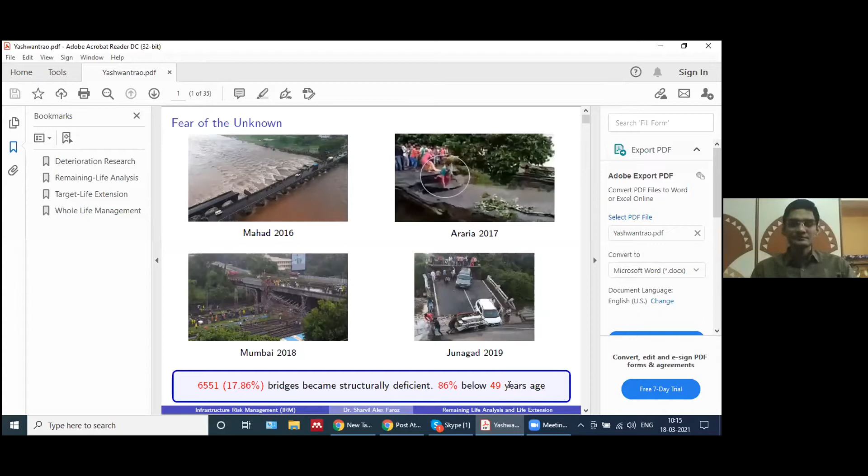Before getting to the main topic of my presentation, I will give you a kind of background. You can also give your comments in the chat box. How many of you, when you are going under a bridge, either walking or going through a vehicle, do not feel safe? I myself, sometimes when I'm walking under a bridge, I look up, wondering will it fall or not.

So that is how the situation has become these days. Basically, it is the fear of the unknown. We don't know when a particular bridge is going to fall. And why has this mindset come? Because from the past 5 years, since 2016, there has been at least one bridge collapse in our country. Here are the few major events which had occurred.

In 2016, this was the Savitri River bridge collapse in Mahad. Then in 2017, there was a bridge collapse in Bihar, Araria. Then in Mumbai in 2018, this is the Andheri bridge. And then this is the Junagad bridge in 2019. So if you see, every year there is one collapse of bridge. So it is natural that we feel unsecured when we pass under a bridge, or any other infrastructure for that matter.

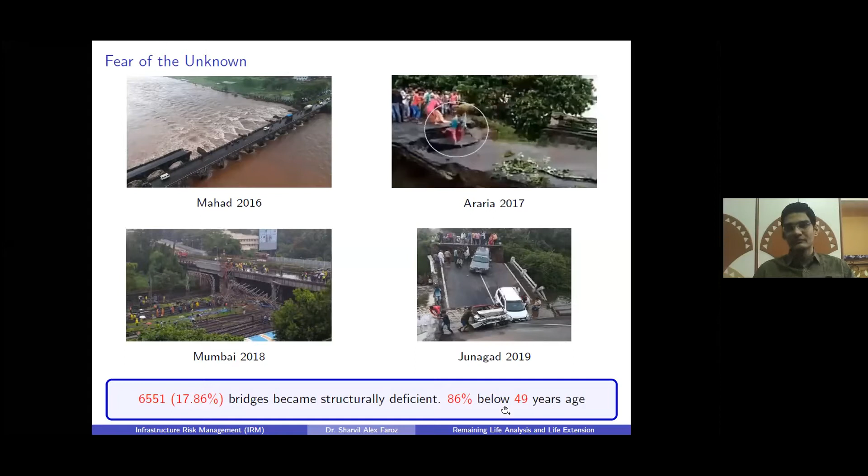Now, as I told you about deterioration, these deteriorations are very important if you want to know the condition of a bridge. And since this is a platform for innovations in concrete, understanding the deterioration is also one of the innovations. So let us understand a few basic deterioration cases which are very common.

There are others also, and since we have a limited time frame of 1 hour for our presentation, I'm going to present only about very limited technology. In 1 hour, it is not possible to cover everything for a given bridge, but you will get an idea of what kind of things are going on and so on.

So this you can know here. First, basically 80% of the problems are due to corrosion only. Mostly, if you see, 80% are due to corrosion.

There is chloride induced corrosion and there is carbonation induced corrosion. If you go to a beach and observe the structures close to a seashore, you will find that a lot of corrosion is happening, because of the chlorides which are coming from the sea. They go and attack the concrete.

Then the second one is loss of strength of the concrete. If you build something at M20 grade of concrete now, over 50 years the strength will reduce somehow, because of other various attacks which are occurring.

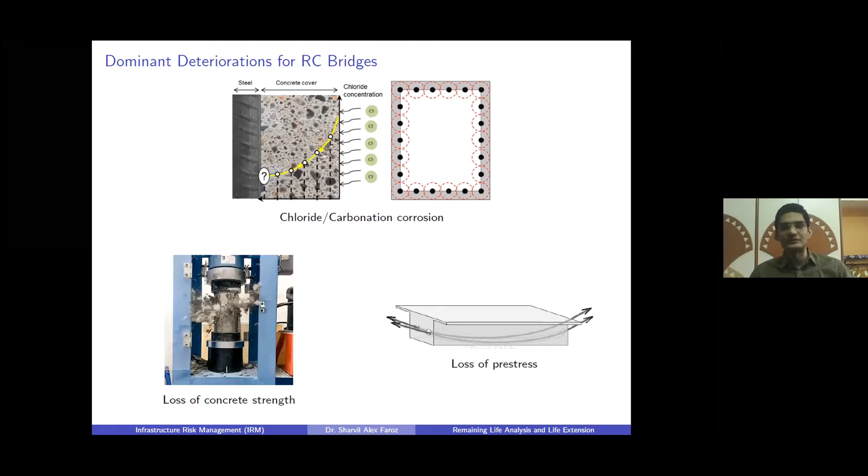Then this last one here is the loss of pre-stress of concrete. We are seeing a lot of pre-stressed bridges, but over time these strands lose their pre-stressing force, and this is a very big challenge in the industry today, because many bridges we have constructed are pre-stressed, but we are not able to find out

what is the existing level of pre-stress. We have also developed technology for this, but again, this is limited to only remaining life analysis. So I'm not going to tell more about this.

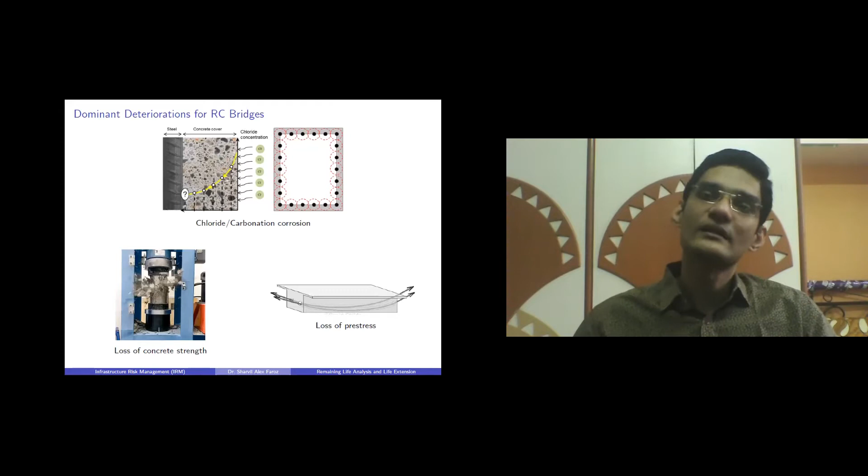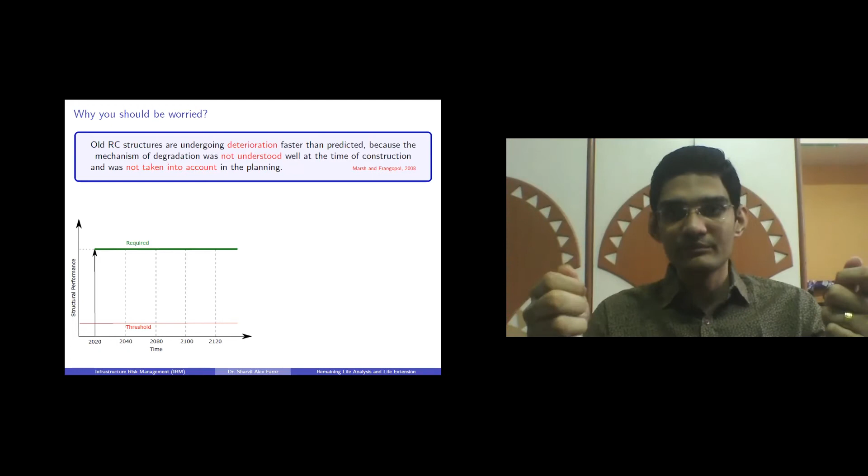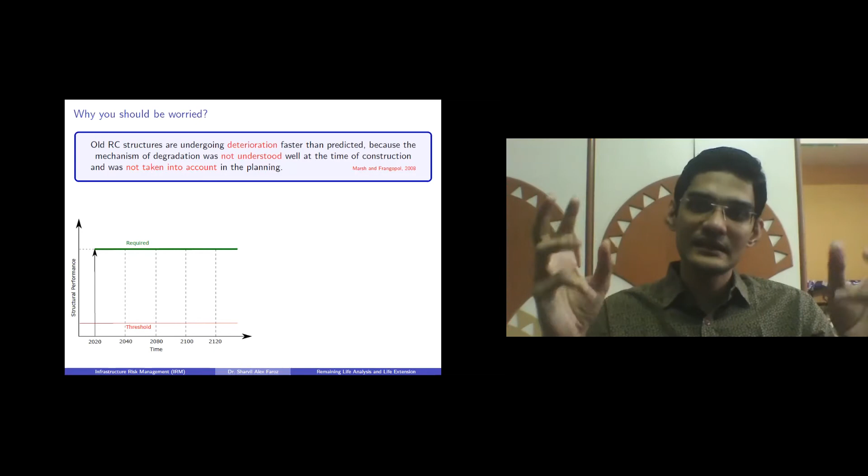You know that in simple language, if we do not consider a particular load on a bridge while designing, and when that load comes on the bridge, it fails. The simple logic is that this is a simple logic. So we did not consider deterioration to be an external load. Therefore, whenever deterioration takes place, it causes failure of the system.

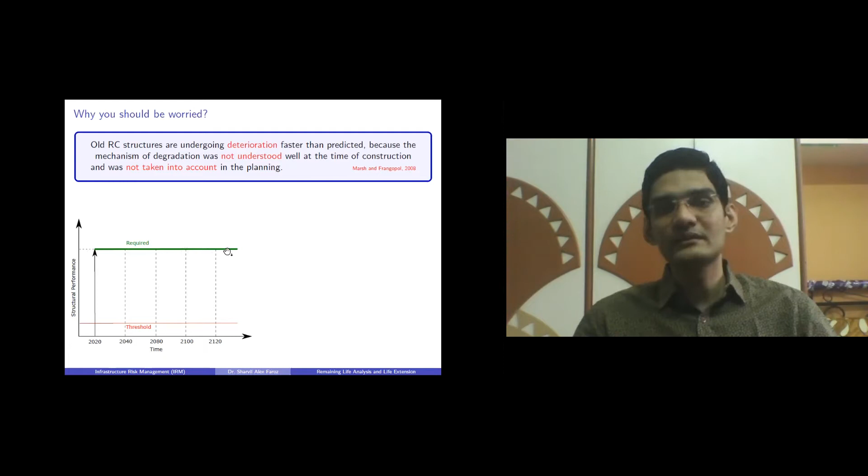So here in this figure, you can see what I am basically saying - that when I constructed this structure, I considered that the performance is going to be the same throughout its life. That is how we used to design the structures. We did not consider that the performance is going to fall down.

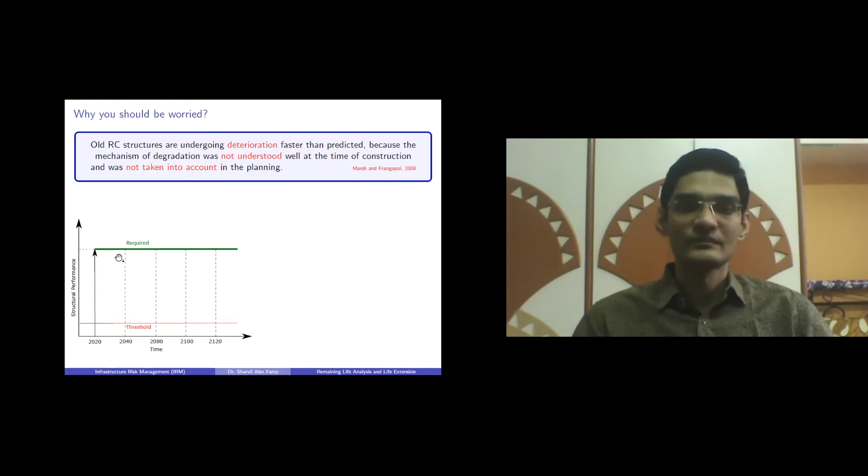Then the other issue is also that when we are doing investigation of these bridges, we do visual inspection. But what happened in New Zealand, these engineers were going and doing inspection of the bridges. And one of the bridges, which is called the Sorell Causeway Bridge, they also inspected that bridge. It was very close to the seashore, and it was a pre-stressed concrete bridge.

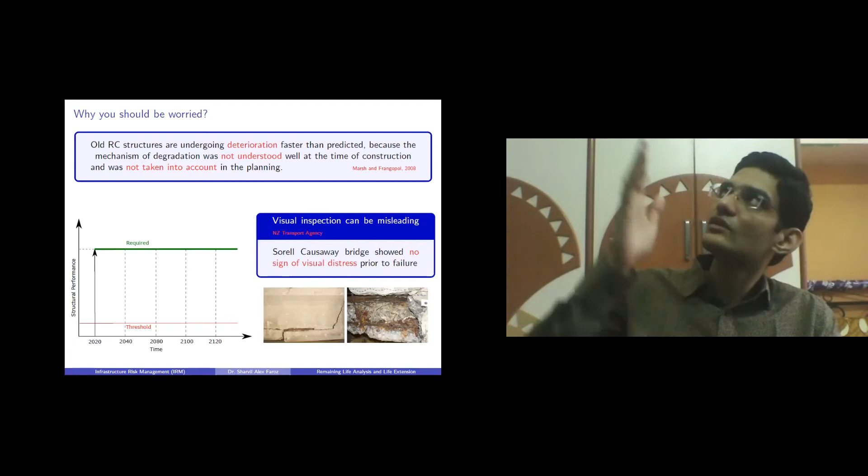From visual inspection, they did not find out anything. But within 6 months, that bridge collapsed.

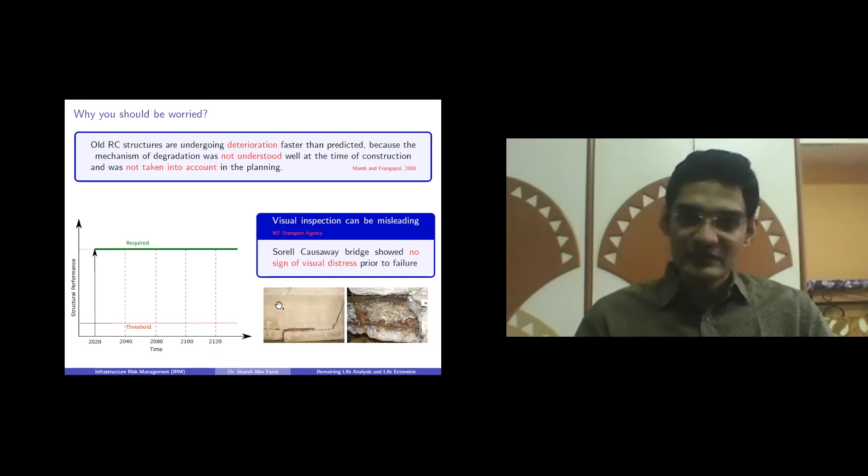When they investigated, they found a lot of corrosion, and at some places the strands were also broken. But somehow on the external face, they did not see any visual signs. See this picture here - anywhere you look, you will not find any kind of distress.

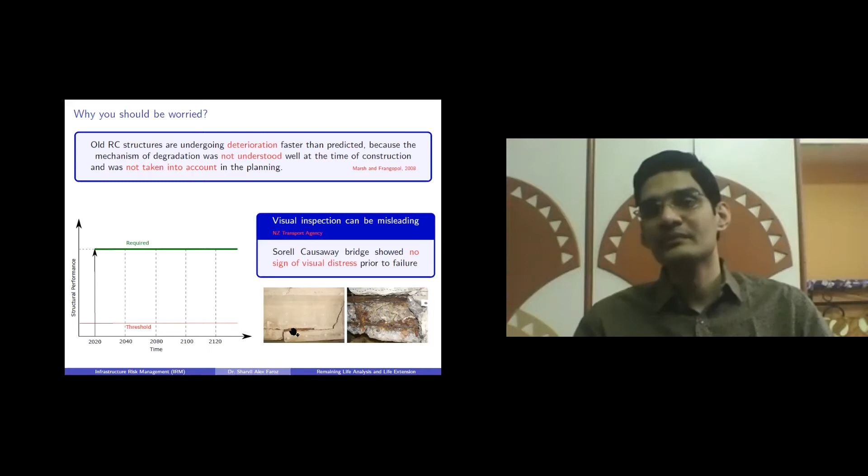These cracks you see here appeared after the collapse - when the bridge collapsed, these cracks appeared. But before that, no signs of distress were seen. So this is also one issue: we cannot rely on visual inspection always to check the condition of the bridge. This is also one of the reasons why bridges have collapsed.

So what we learned here is two things. First, we did not consider the deterioration in the design stage. Second, visual inspections cannot be relied upon. So we need something better to do an assessment of the bridges.

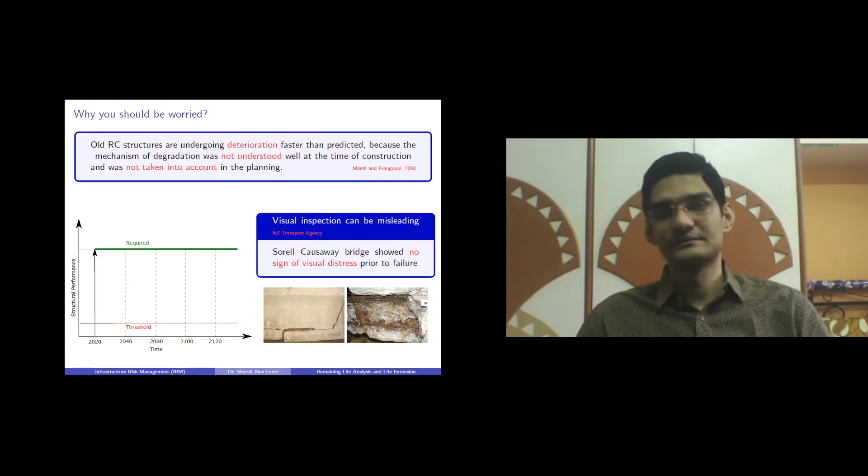Let me share with you 3 points or 3 demands of the bridge owners. Recently I spoke with one of the PWD engineers, and they told me that we have so many bridges.

The issue is, first of all, we do not know what is the condition of the bridge. Since there are so many bridges, it is very difficult for us to tell if a particular bridge is going to collapse, or if it is safe - that we do not know. So always the first question they have is: when will the particular bridge collapse? Will it collapse today, tomorrow, day after tomorrow, or will it collapse when I am standing below it? This is a very fearful situation which is there today.

And the second question which they ask is, if we want to extend the life of that bridge, is it the right time to do the retrofit, or is it the right time to do a repair or rehabilitation of the bridge? I will tell you why this is important.

See, first of all, a bridge is so costly that you cannot directly go and replace it unless there is a complete collapse. So first of all, we want to save money because the government is saying we do not have enough money to spend. Therefore, with minimum amount of money, how can we extend the life of the bridge? So the timing of retrofit is also very important.

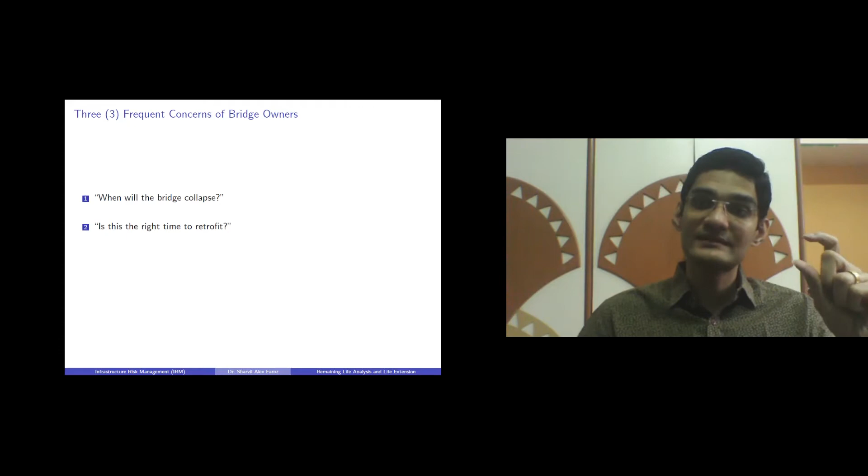Take an example: if the bridge is going to collapse tomorrow, and if I have to do retrofit today, then what I am essentially doing is a complete rebuilding of the bridge - so the amount of money spent is more. Now suppose I know 5 years back that my bridge is going to collapse on 19th March 2021. Then I would have done repair at that time, 5 years ago, and spent very little money to extend the life of the bridge. So the timing of the repair is also very important - timing decides the amount of money, because more the deterioration, more money you have to spend for doing the repairs.

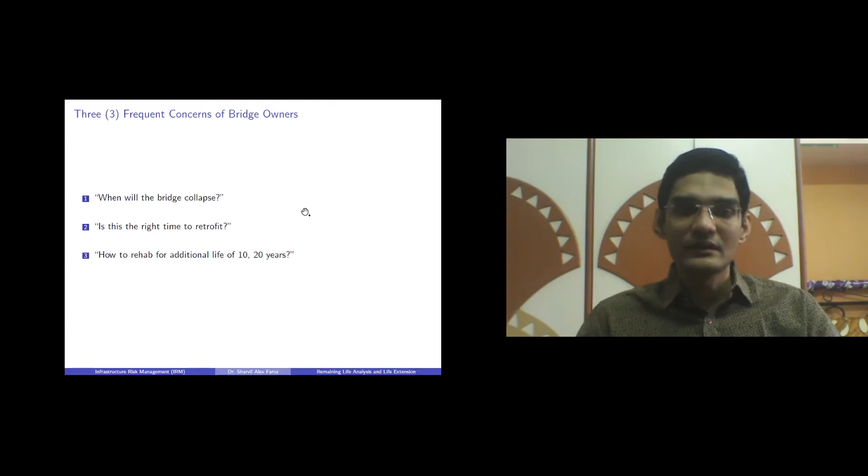And thirdly, if I want to extend the life of the bridge for 10 years, what kind of rehabilitation scheme should I use? You might ask why I am including this here - I'll tell you why. Whenever we ask the contractor or the consultant, who are basically repair contractors or repair consultants for bridges, what will be the extension of life after you do the repair, they will say 5 to 10 years. You also heard this, right?

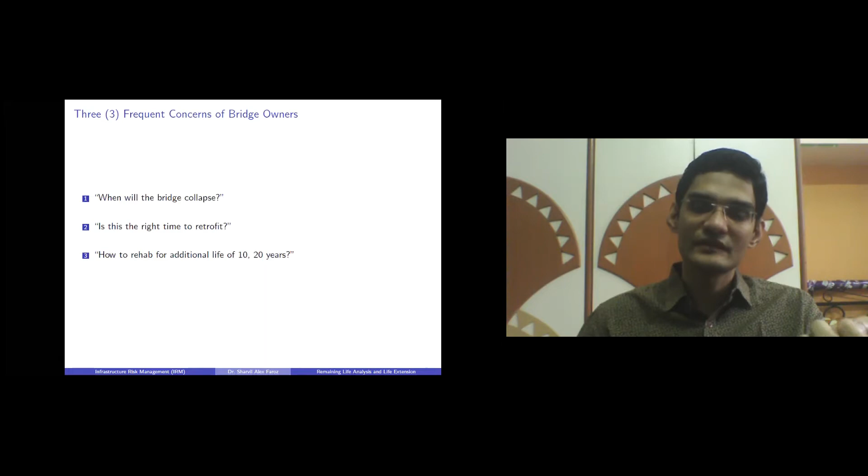So we have to do something such that whatever retrofit we are doing to the bridge, its performance is such that it is in our hands to control it, so that we can provide exactly the repair which is needed to give an exact life of 10 years or exact life of 20 years.

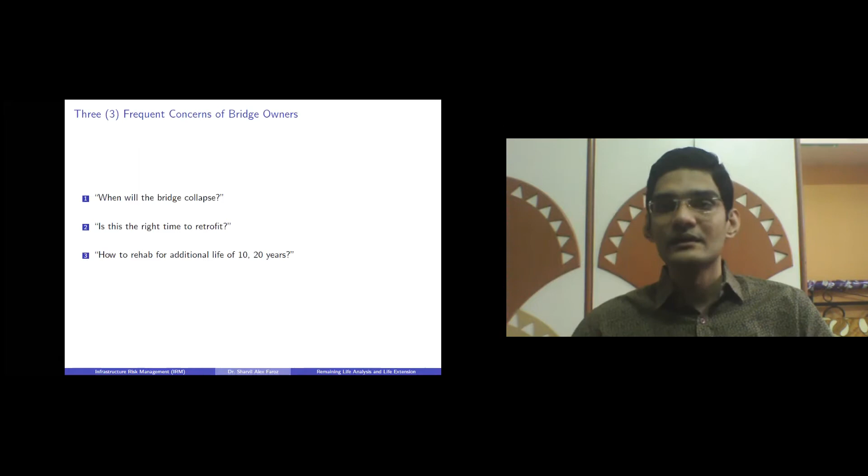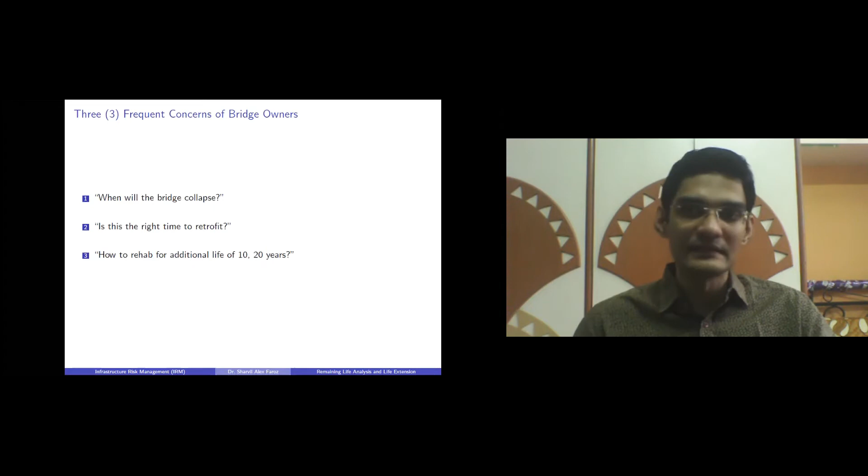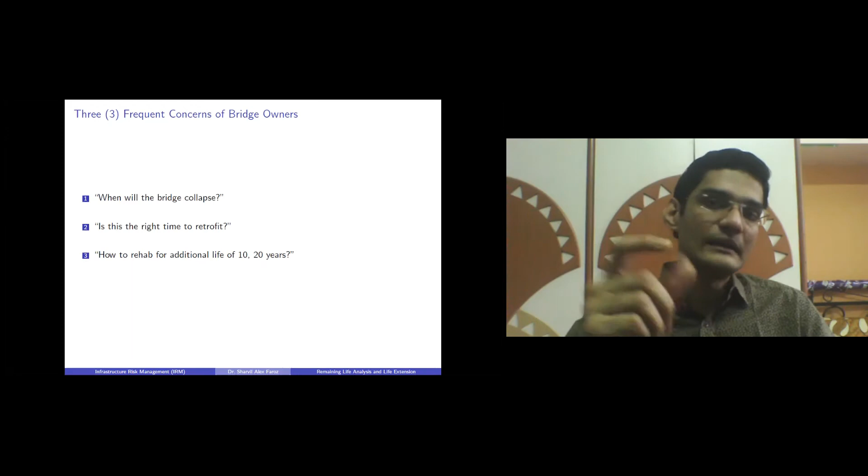This is very important because ultimately, when we stand below a bridge, we think it will fall down - it means we don't have confidence in the bridge. Similarly, when a contractor says 5 to 10 years, it means the contractor himself doesn't have confidence, and neither do we. So if we have precise confidence on the extended life, that will be really helpful and beneficial to the country and to ourselves.

Considering this background, I will now go through the presentation. I am focusing on two things: the first is remaining life analysis, which answers the first point, and the second is target life extension. Target life extension of a bridge means the kind of scheme or retrofit applied to the bridge so that we achieve an exact value of life extension. So if you tell me you want a retrofit of the bridge with a life of 20 years, I will give a complete calculation and testing showing the life extension is exactly 20 years. That is something new and innovative that we are doing in concrete technology.

Before this slide, I always like to present about research, because research is very important. When I first started my company and went to the client with this technology, he asked how he could be sure it would work. A very valid question - the client has been under uncertain conditions, there have been bridge collapses, and trying something new always brings skepticism. So research helps a lot - we have to show proof. Then I showed the client all the researches that have been done, all the technology tried and tested, including at IIT Bombay where I did my PhD, and the systematic process through which this technology is implemented. Then the client got convinced that yes, it is possible.

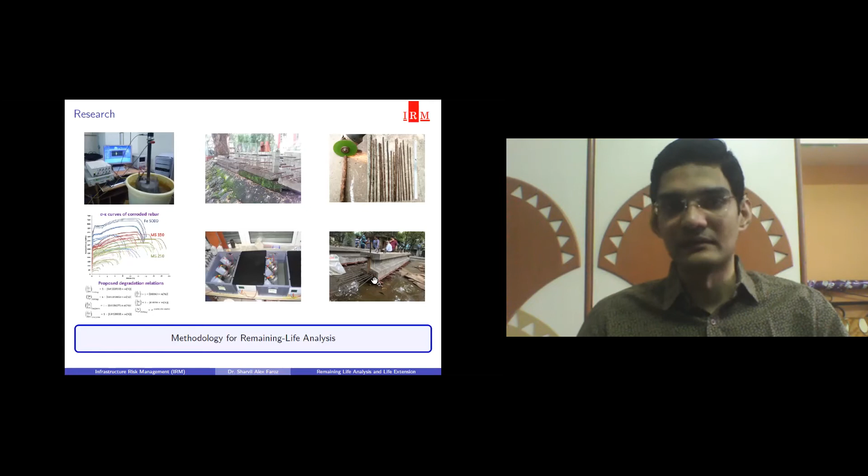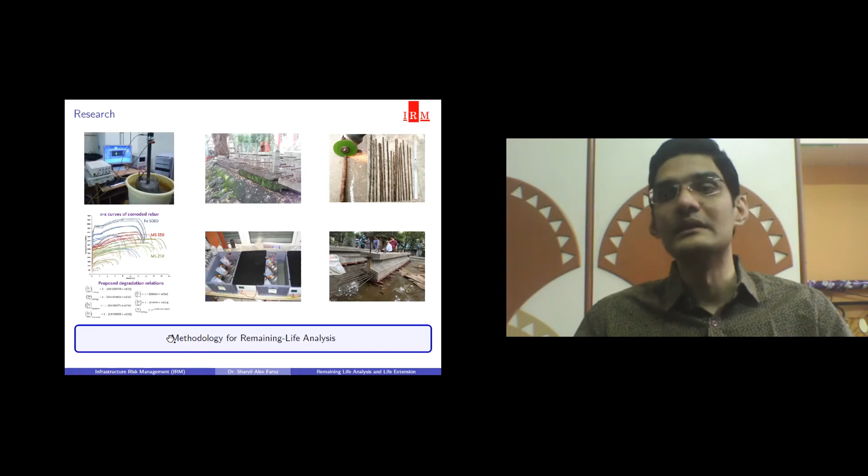In this research, we studied and developed the deterioration functions for concrete as well as steel, and how they behave over a period of time. We also did more studies, but here I'll focus on corrosion and how to do retrofitting. Ultimately, we formulated the methodology of remaining life analysis. In short, remaining life analysis is like a Janam Kundali - a birth horoscope - of the bridge. We predict in the future when it's going to collapse, when it's going to need repair, and so on.

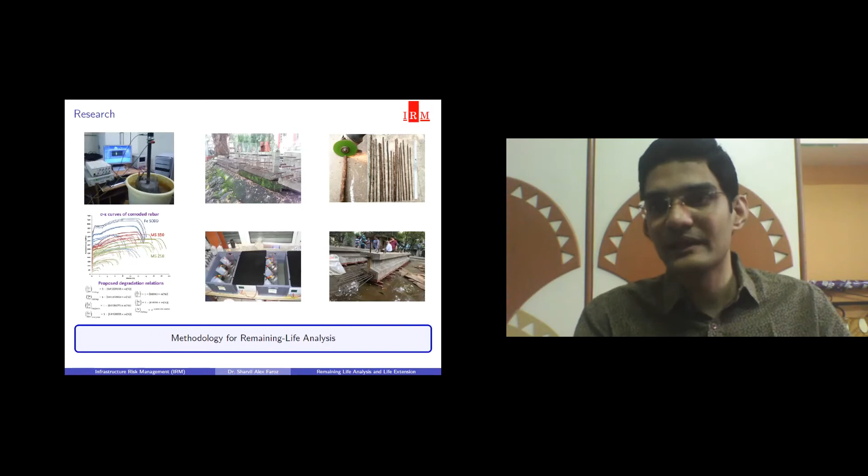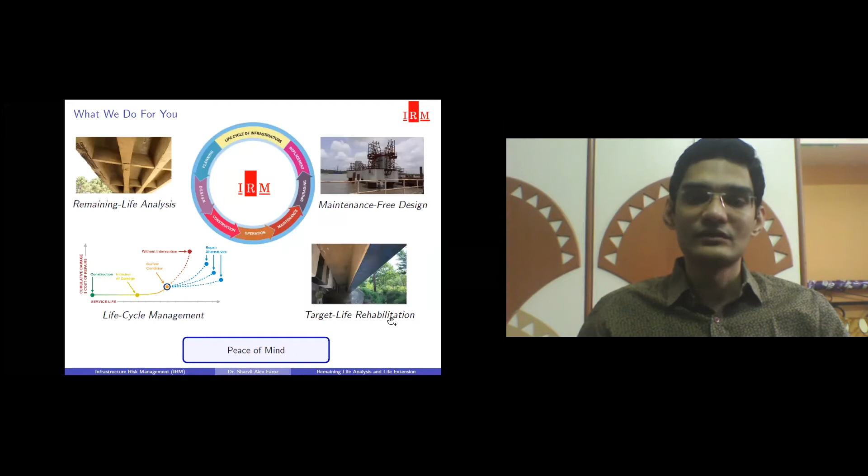My company specializes in 4 sectors. One is remaining life analysis, which I'm going to talk about. Then maintenance-free design - I talked about this in FDP number 1. Then life cycle management. And today's other topic is target life rehabilitation. So these two things, remaining life analysis and target life rehabilitation, I will be talking about today.

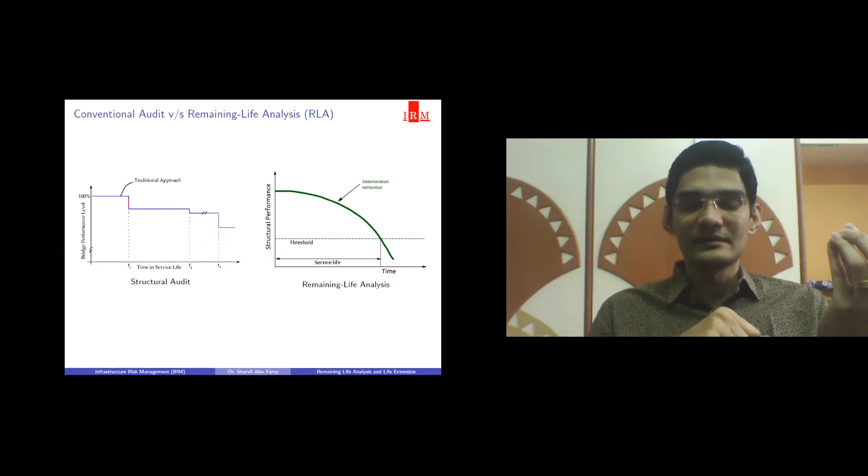Before going to remaining life analysis, let us understand the difference between a structural audit and a remaining life analysis. You are very much aware of structural audit - something we do periodically to check the condition of the bridge. But if you think critically about a structural audit, even after doing all the formalities - inspections every 2 or 3 years - why are bridges still collapsing? If structural auditing is done properly, why do bridges still collapse? The fundamental problem of a structural audit is that it doesn't tell us the future of the bridge.

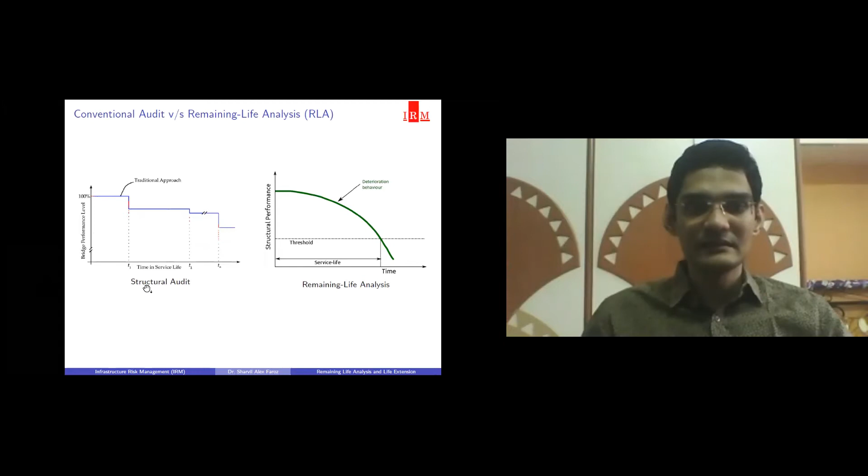Okay, it just tells what is it today. So if you check this figure on the left here, this is the figure which shows what is the structural audit.

Initially, the structure is new. Because we did not consider deterioration to take place in our design, we consider that the performance of the bridge is flat, meaning it is non-degrading. Then when we do our first structural audit, we find that the bridge has degraded, so we get it down. So this is the present performance of the bridge.

Then again, because our general engineering community does not consider deterioration to take place, again the performance is flat here. And when we do the second structural audit, we again find the bridge has degraded, and we bring that performance down. So you see that between these two structural audits, at time T1 and T2...

If we are not able to predict how the bridge is going to behave over time, then if that bridge is collapsing between T1 and T2, we are completely unaware, because the structural audit is not able to provide us with the prediction of future behavior. So this is the basic problem with the structural audit. Even if you are doing structural audit, it does not prevent the bridge from failing or collapsing. You cannot tell from a structural audit when the bridge is going to collapse.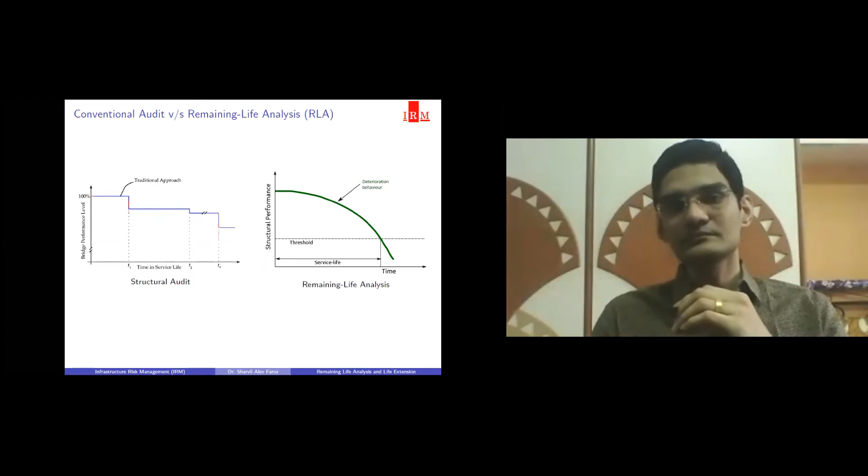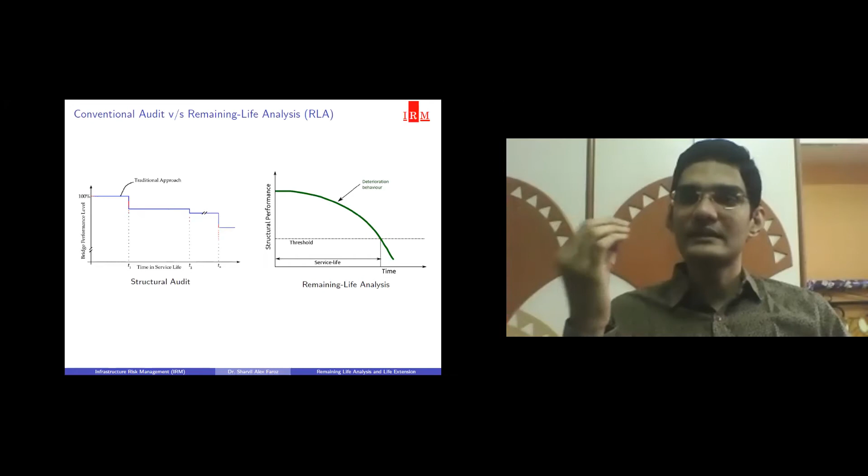Whereas on the right hand side, in remaining life analysis, it shows you a continuous, degrading behavior of the bridge. So what it helps you is tell you precisely at what time there is an end of service life, which can be either the collapse of a bridge or when the bridge would require its first repair. So that is how remaining life analysis is a better way of doing an assessment than a structural audit.

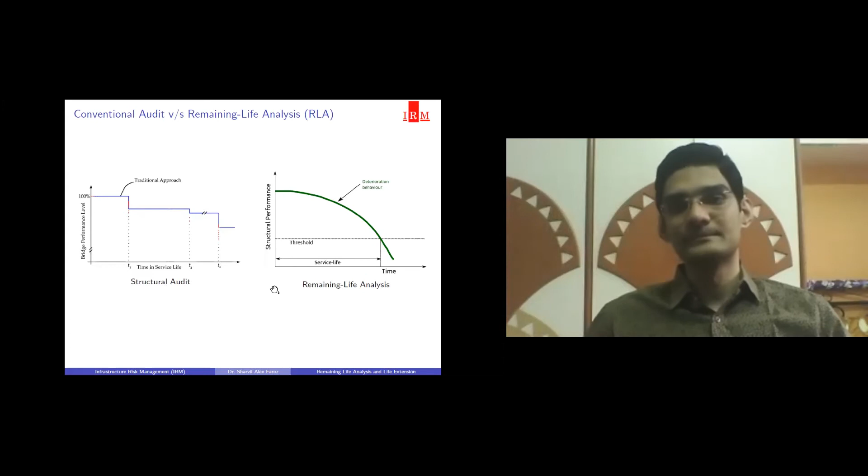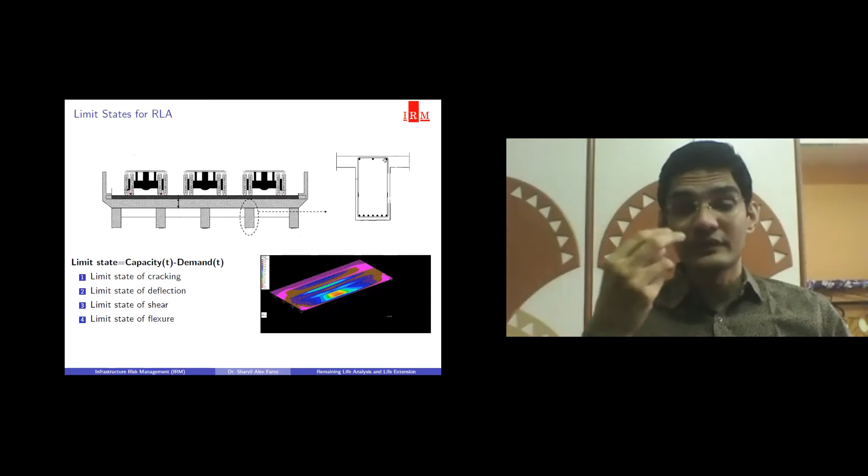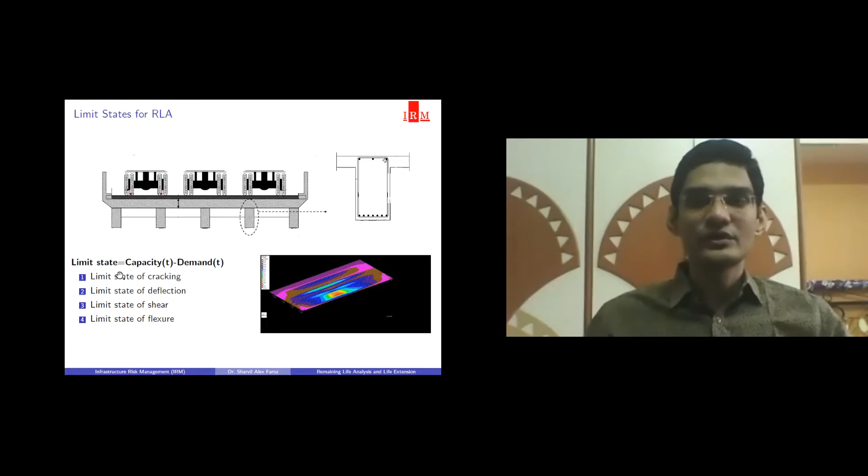Now to determine the life of a bridge, we need to first identify the critical deteriorating factors for a particular bridge. Let us consider this bridge is there. Then you have heard about the limit state of collapse, limit state of serviceability, right? So these same limit states we are going to use, but in a better way.

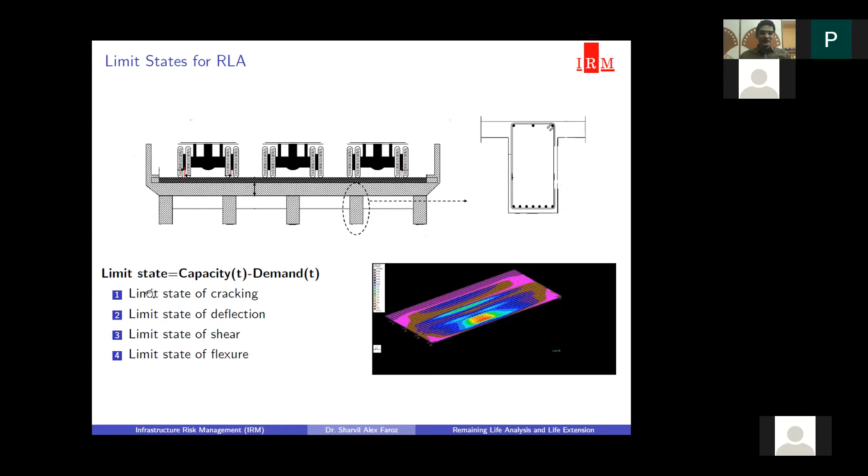See, you are aware of these four conditions: limit state of cracking, limit state of deflection, limit state of shear, and limit state of flexure. Now the first two are called the limit states of serviceability, and the second two are the ultimate limit states.

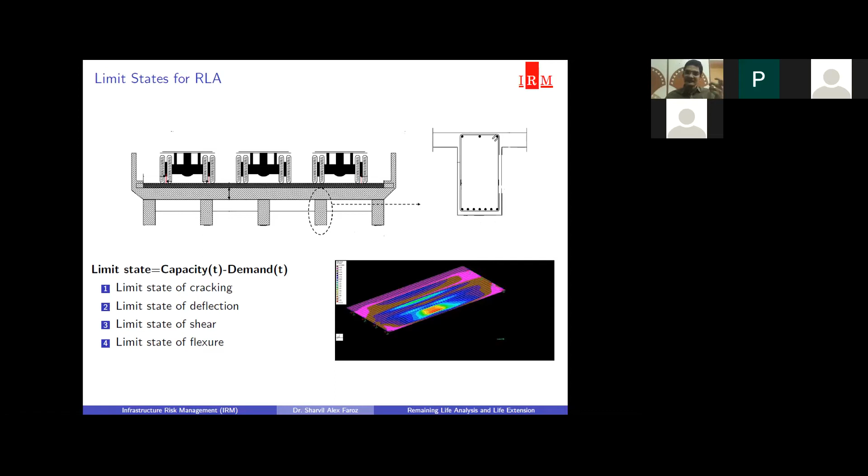So depending on what kind of situation you are handling, let me give you a perfect example. Whenever you see a crack in the bridge, you go for a repair. So the appearance of a crack on a bridge is the signal that the bridge requires some repair. So you can have a limit state of cracking here as considering the end of the service life.

Then suppose your criteria is that there should not be much deflection of the bridge, so that could be your end of service life. Whenever that bridge crosses a certain acceptable deflection, that is the end of life. Or you can have shear or flexure similarly. Now the important thing is to predict when this cracking or deflection will happen. That is most important, and that is where remaining life analysis comes into play.

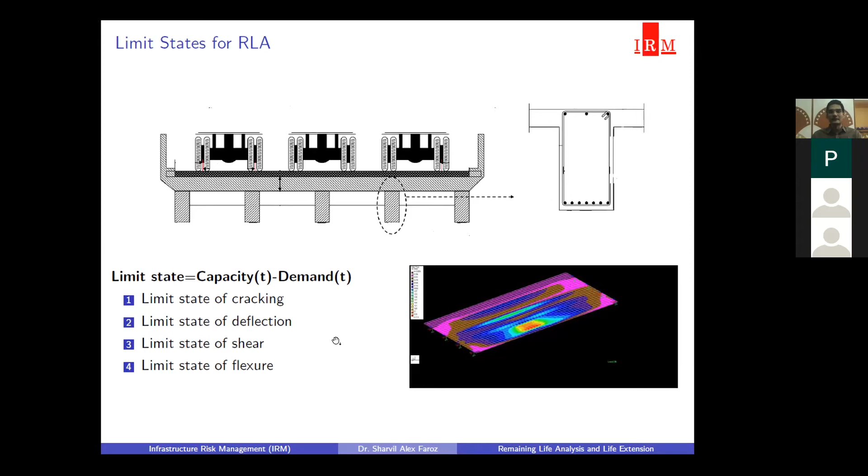So I will share with you one project I did during my PhD itself. We took this as a study for the PhD, and implemented all these technologies. So this, you can see, is a very simple bridge.

It is a slab bridge supported on masonry piers. So we are focusing on this slab bridge itself, which is a 6-meter span with 230 mm deep span, 230 mm slab thickness, and reinforcement of 25 mm running both sides.

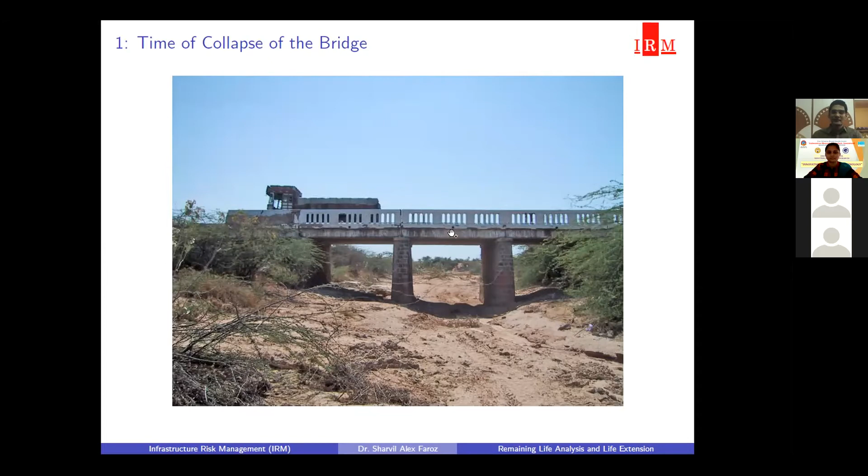So first of all, we need to first find out what is the strength of the concrete, because if you want to find the structural performance, two components we need to see. One is concrete, one is steel. So both we need to study to find how it is going to degrade.

So here in this first stage, what we did, we had to first identify what is the strength of concrete, not just strength. We need to find the characteristic strength, FCK, or the grade of concrete. Is it M20, is it M50, and so on.

Conventionally, what people are doing, they will bring a hammer. They will do ultrasonic pulse velocity, rebound hammer, and take some cores randomly somewhere. But by doing all of this, nobody has ever done the estimation of characteristic strength. What they just report is the average value of rebound hammer, average value of ultrasonic pulse velocity, and average core strength. And that too, very few cores are taken, 3 cores, 4 cores.

Now, if I take only 3 cores, how am I going to find the characteristic strength? Because if you see IS 10262, it says that minimum 30 concrete samples are required if I want to find a good estimate of concrete strength. But here, if we are taking only 3 concrete samples, it is very difficult — I would say impossible — to find the characteristic strength.

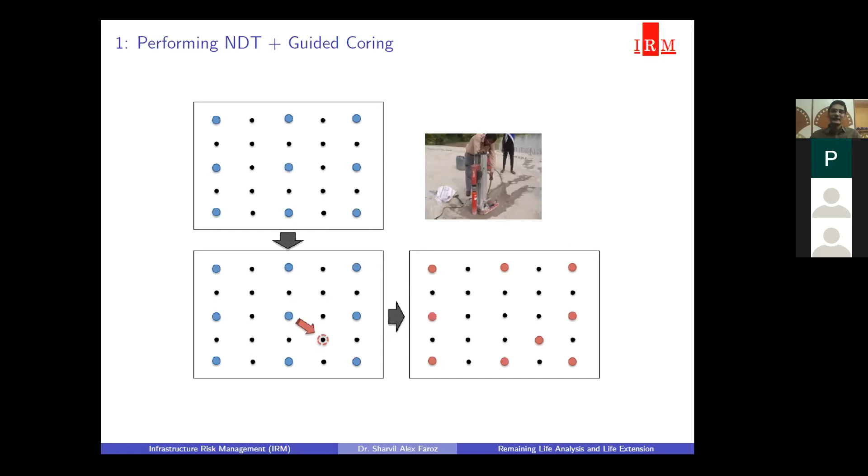This is known as guided coring because it was guided by the NDT test. Then once we have taken the cores, we need to establish a relation between UPV and the core crushing strength. Only 9 cores were decided, so 9 core selection was done. But again, IS 10262 says 30 concrete samples are needed.

So we needed to first establish a relation between UPV and the concrete core. This is the relation between UPV and concrete core strength which we established. You can see there is a lot of variation — these red spots are the actual data points, and there is a lot of ups and downs, no smooth line. So it was necessary that we capture this variation or scatter as well.

So now what has happened — we have established a relation between concrete crushing strength and ultrasonic pulse velocity. So basically we are finding the strength of concrete at every UPV point which we have measured. Thus we are automatically satisfying the codal requirement of 30 concrete samples, without doing that much concrete testing itself. By doing this, we formulate the distribution and the 5 percentile value, which is the characteristic strength or grade of concrete that we are able to establish.

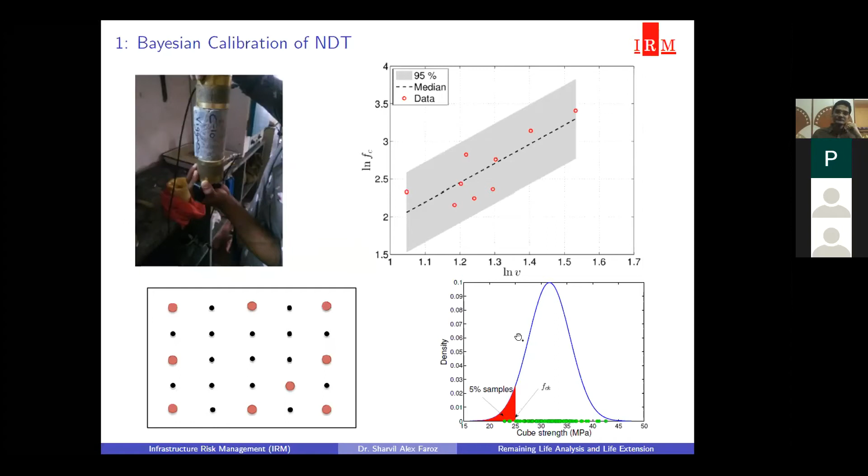Now we come to the steel part. In the reinforcement work, we found a lot of corrosion. Considering corrosion, the rebar cross section will continuously go on reducing, and when the rebar cross section reduces, its load carrying capacity goes down.

To identify how fast the corrosion is taking place, we again thought of doing a strategic testing. We divided the concrete span into 3 parts, L by 3, L by 2 and 2L by 3. These are the reinforcements passing through, and the black spots are the locations where we wanted to do the test.

Now what kind of test to do? We want to find out how fast the reinforcement is corroding. So this test is called linear polarization resistance test, or you can call it the corrosion rate test. When you do the testing at these points, it gives you the rate of corrosion, or how fast that particular reinforcement is corroding.

But this test is quite costly, so it was not possible to do at many locations. So we just did these 3 locations where we had our most interest.

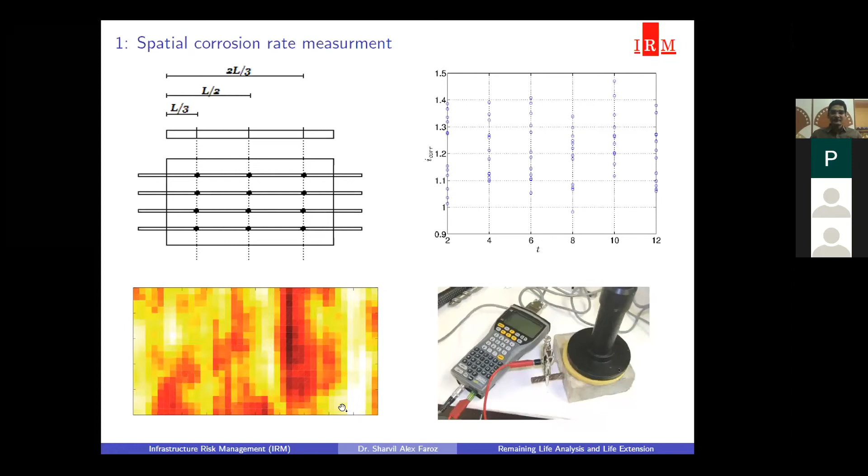Using the kriging method, which I told you, we are able to establish what the corrosion will be at each and every point here. So in this figure, where it is very dark or red, those spots are corroding very fast. Where it is showing light color, the corrosion rate is not that fast. So we have established a complete map of the corrosion rate of the bridge.

So now we know what the corrosion rate is going to be, and using these measurements of corrosion rate, we use these readings to update the corrosion model. So what is a corrosion model?

This is a model which tells you what will be the loss of steel over time. There are a few models available in engineering knowledge which tell you how fast the steel is going to lose its cross section area. But there is a limitation: these models were developed in the lab, and when we apply them to actual site projects, they fail miserably.

But their physics is correct. That is one thing that is sure, that the physics is correct, but the trend is not correct.

So what we did, we collected this corrosion rate data from the bridge itself and used that to update these corrosion models through Bayesian updating. Bayesian updating is one of the techniques which I am using very often to update the corrosion model.

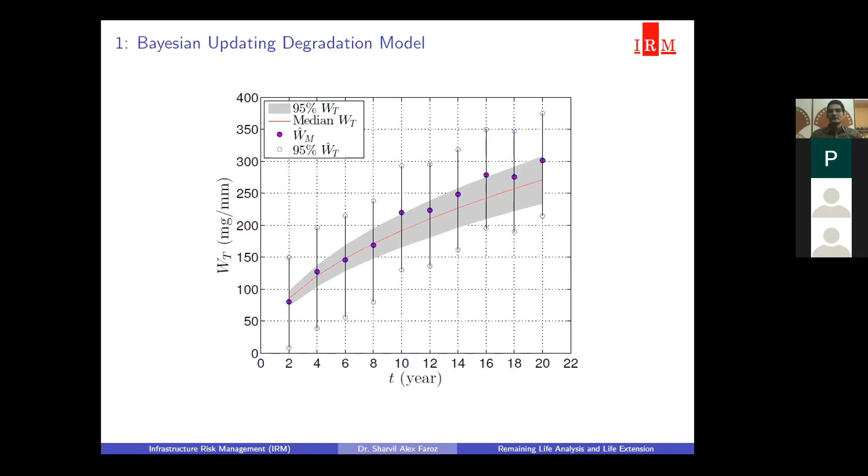So now we need to decide the limit state. This bridge was governed by limit state of flexure. You see, it is a slab bridge, so mostly the most governing factor will be the flexure or bending moment.

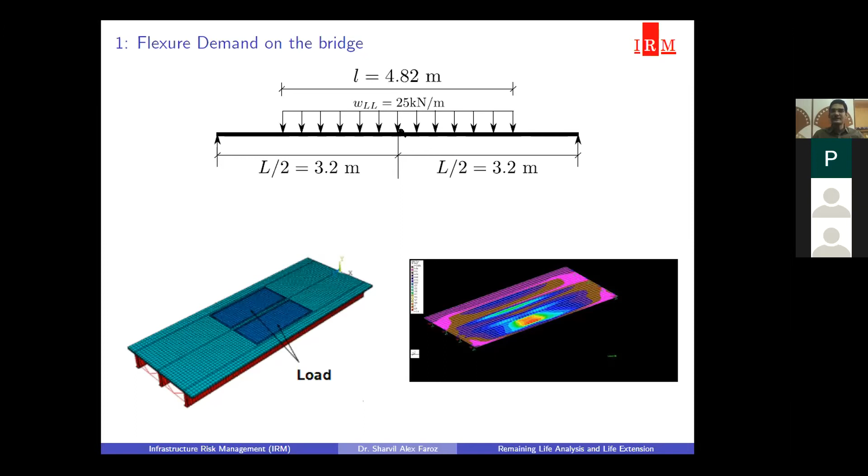This is then the limit state of flexure we have formed. So limit state of flexure is this: MR is the moment of resistance of the bridge, and moment of resistance consists of two parts. One is concrete strength and the second is how the steel is going to corrode.

For simplicity, we considered that whatever concrete strength we found out in this investigation remains the same. But we considered the loss of steel of reinforcement to be a function of time, so the reinforcement cross section area goes on continuously reducing over the next few years. That is the assumption we made.

Of course, this assumption can also be overcome if in the next 2 years I again measure the concrete strength, then I know how the concrete variation is going to take place over time. But that is also possible to do.

And this MQ is the external load. I told you, right, the IRC truck which we got on the bridge, that is the load, that is the bending moment induced by the IRC truck.

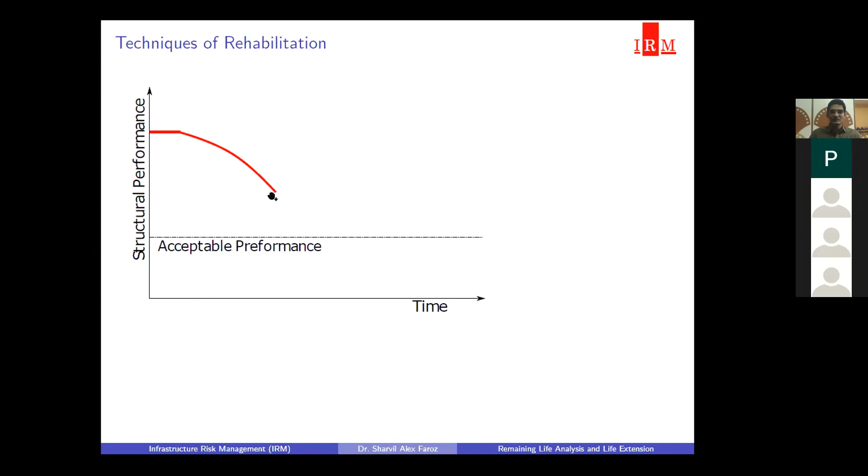Now let us come to the concept. As I told you, structural performance is there and it is degrading over time. Now we have found out in the previous section what is the time of the repair - this is the time when we should do the repair. So here we did some repairing and the performance comes up again.

Our current consultants and contractors are limited only to this point. The client will approach them, they do the repairing, and that's it. They know how much they have improved the structural performance, but they do not know how long that repair is going to last.

What my company is adding further to this is this part - we do the rehabilitation of the bridge, plus we also give you the confidence of the life of the repair. So if you tell me you want the bridge to have an extended life of 20 years, then considering the performance or deterioration of the repair over time of 20 years, we do the corresponding kind of repair.

The concept is very simple, but existing people who are there are not doing it, probably because of a lack of knowledge or they don't know how to handle such a situation. But this is a very simple concept.

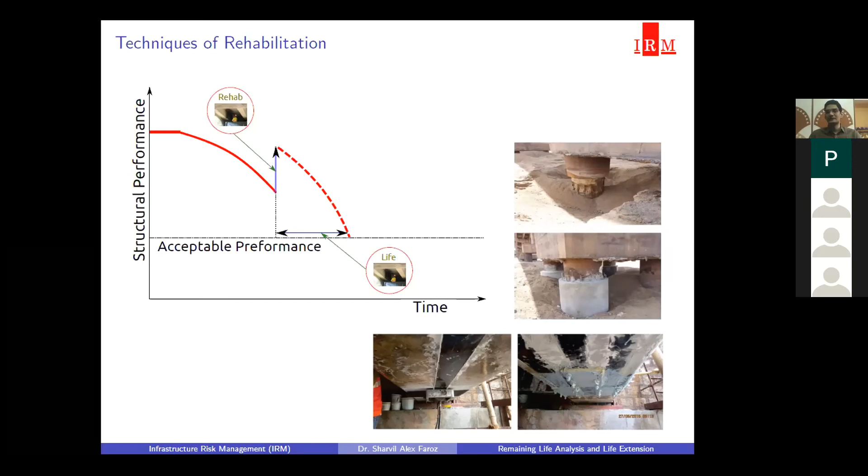So this is one project. Before getting to it - what happens when taking any new technology to the bridge, they first ask: have you done a case study of this? Have you actually executed a project with this or not?

So this project - this is not a bridge, this is a building project. But since this was the first implementation of the technology where we did it, I am showing it here for you. After this, once this technology was established, the bridge owners started taking much more interest in this.

So what happened in this hospital? Okay, it was in very bad state. You can see here, this is one of the columns, and it was degraded completely. Concrete strength was just 5 MPa. Steel was also corroded. Lot of breakages were also there.

But this was a hospital building and there were many patients, huge demand was there. So the client said, instead of doing a demolition, let us do a rehabilitation of this building. And we want a life of 15 years, because after 15 years we'll think of demolishing this building. But for now, let us have a life of next 15 years.

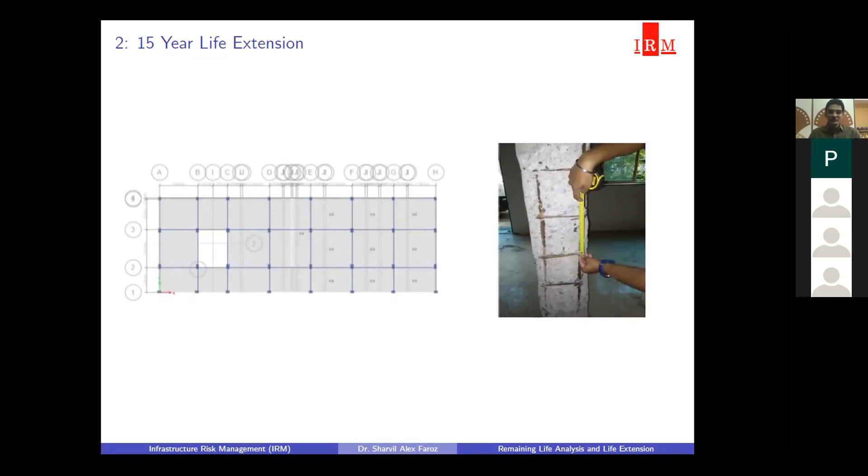So this was very specific demand from the client. The client themselves told that we want a life of 15 years, plus you should also give us the proof, or the engineering calculation which will prove to us that yes, the repair you are going to do will last for the next 15 years. So this is the schematic.

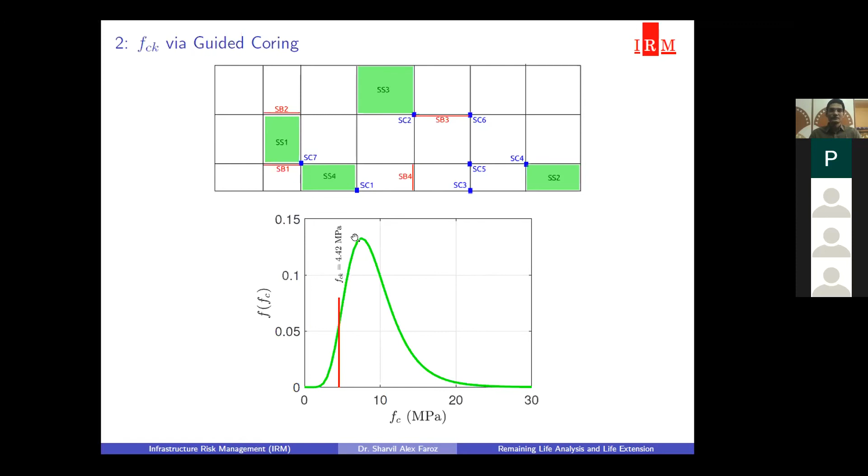We did lot of testing. We found out the concrete strength through which I have already explained to you. Now the thing was to identify the deterioration parameters. We found out two deterioration parameters. One was the chloride induced corrosion, which was prevalent under the foundation level.

So there was lot of chlorides in the soil. This was causing corrosion in the foundation. So first we had to identify how much is the chloride. So what we did in the foundation, what was excavated, we did the so-called chloride profiling. In chloride profiling, we found out the concentration of chlorides at each and every depth of the concrete.

So we came to know what is the amount of chlorides at the surface of the concrete. So on surface of the concrete, we had so much amount of chloride, say 1.3% mass of the concrete. So this was the amount of chlorides which was existing, that we found out.

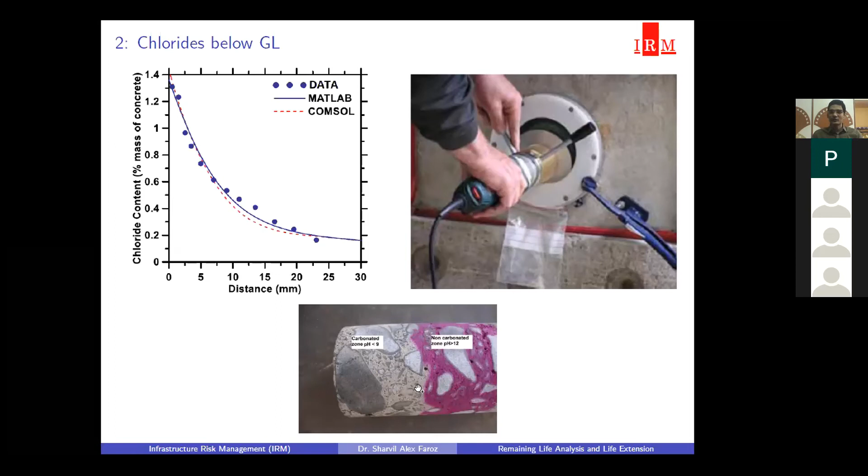And second, also we found out for the above the structural components which are above the ground, carbonation was the main issue of corrosion. So we tested a lot of samples for carbonation here, and we found out what is the amount of carbonation rate of the concrete. So we found out two things.

First, the chlorides which are existing in the soil and how fast they are going to penetrate through concrete. And the second thing is the rate of carbonation of concrete. These two things we found out, which were the deteriorating factors causing corrosion.

So once you have determined these parameters, you are in a very good position to tell, once you do the repair, how these parameters are going to affect your repair. And once you control this behavior, you can easily achieve a life of 15 years, what the client demands.

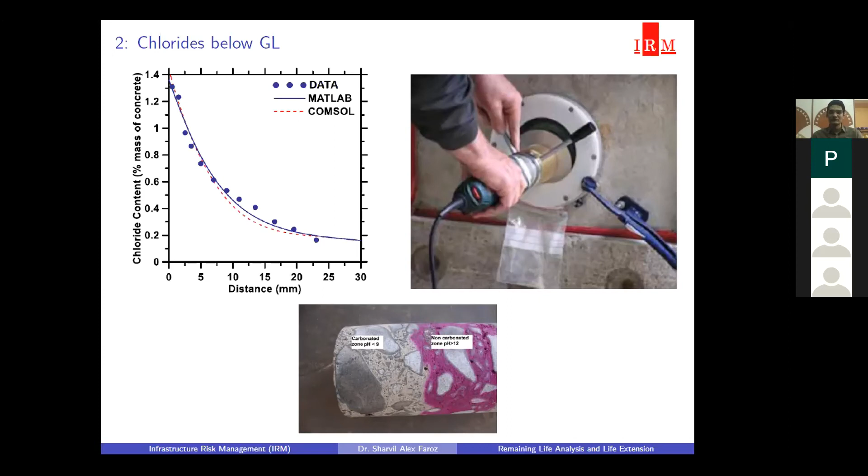In certain situations in the hospital itself, some columns needed increased axial load capacity. So that was done through wrapping them in fiber wraps. Some columns were also wrapped in addition to concreting, to enhance their axial capacity.

Now FRP itself is very resistant to corrosion, but it is very susceptible to moisture. So if my FRP comes in contact with moisture, the resin kind of dissolves and its strength reduces.

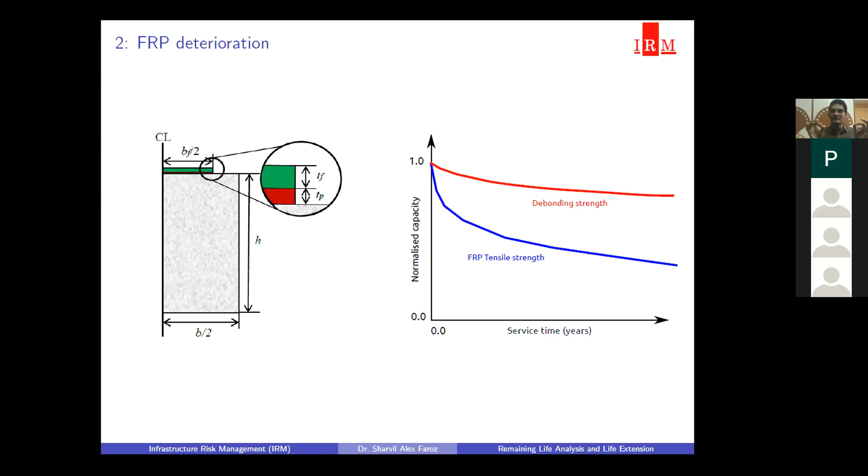So now you see, we are also giving a performance of the FRP over time. So when the client says to me a life of 15 years, considering this deterioration behavior, reduction of strength of FRP over time, we are in a complete position to tell them: see, for 15 years, your material is going to degrade, but its performance will always remain above your acceptable limit. And this is how we ensure for exactly 15 years it is going to serve the purpose.

So this is some of the pictures. This is the section of the hospital building which was done. As I told you, some sections required FRP wrapping also. So this silver here on the bottom, you can see this is the FRP. And this is the concrete section which was enhanced, or concrete jacketing was done for this part.

In the concrete jacket parts, you can see here, or in this figure also, where it is open to the environment, carbonation will keep on attacking it. And you know that when the carbonation reaches the reinforcement, the corrosion will start.

So we design this in such a way that only after 15 years will the carbonation reach the reinforcement level. So before 15 years, there will be absolutely no corrosion of the reinforcement. This is how we ensure that for 15 years, the life will be achieved perfectly.

See, this is very powerful here. You can see that the technology is so powerful. It gives you confidence, plus it also gives you the return on investment. So whatever money you invested for repair, it guarantees that yes, that money which you spent has been really spent in a very good project.

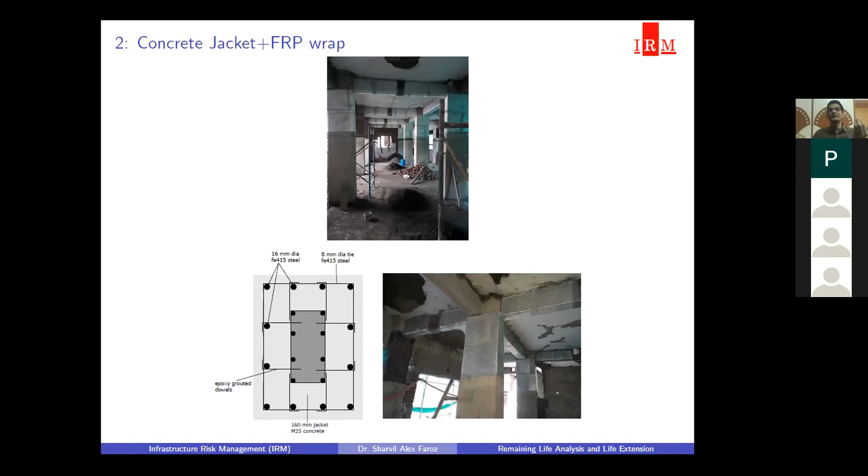So finally, concluding my session today, this is whole life cycle management. So when you consider a bridge which was constructed a long time back, and a long time back means that when it was designed, deterioration was not considered in its design stage. So therefore, it is going to degrade.

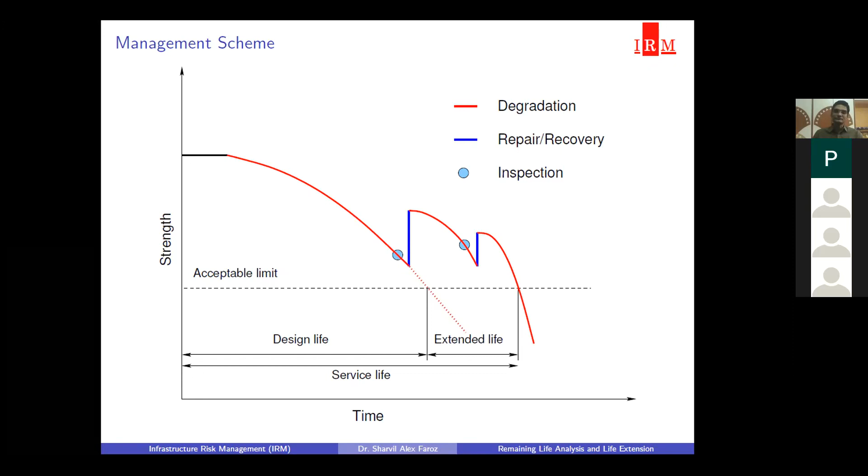So this is how the entire thing works very well. This is really an innovation in terms of concrete technology, because if you see, we are basically controlling the behavior of the concrete. If we are able to design the concrete in such a way that we are able to control its performance over whatever life it may be, it is giving a real revolution to the industry. And no wonder it will save your money, plus it will give you confidence.